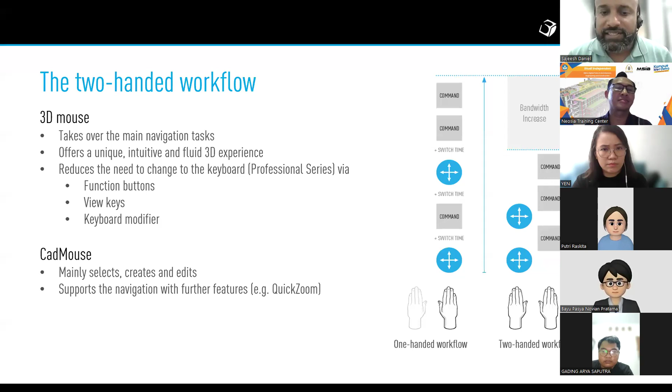I will explain how this works in CAD software. The other benefit of using 3Dconnexion is also the ergonomics part of it, and I will show you how that works. Now let me get straight into the software—I'll just share NX. Raskita, can you see NX?

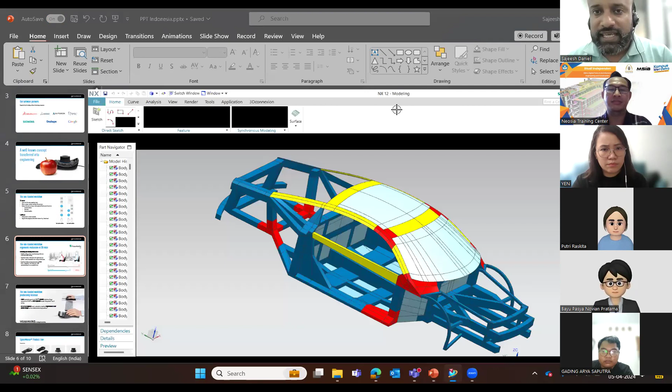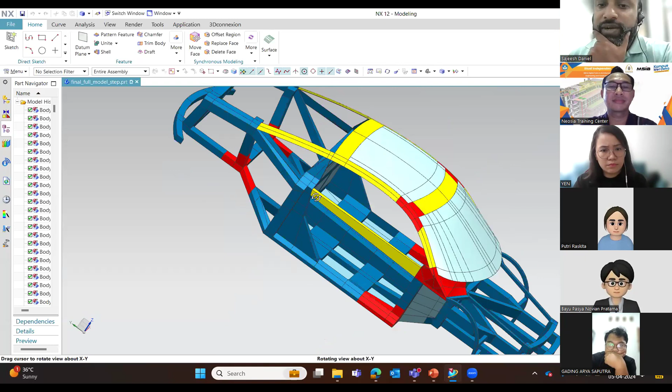Yes, perfect. So now look at this, everyone. When I use one hand with my normal mouse, this is what I do—I'm keeping my hand on my chin. With one hand, you can rotate the model, zoom with the roller, or pan, and stuff like that. So this is how you work with one hand.

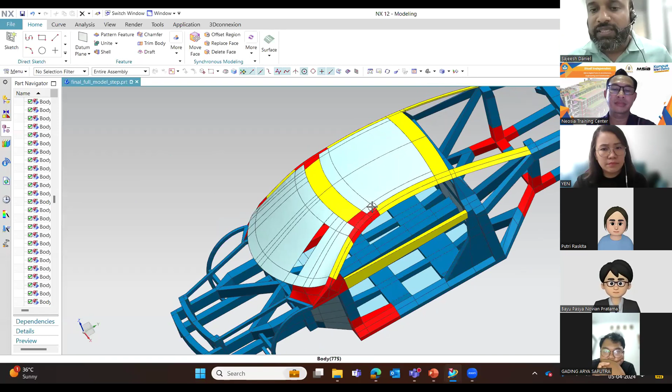But when you use the SpaceMouse, I'm going to hold this and work. See how the model behaves—now the model is moving with 6 degrees of freedom. You have zoom, pan, and rotation happening simultaneously. This is a very powerful feature used by lots and lots of companies. There are millions of engineers in the professional world using the SpaceMouse.

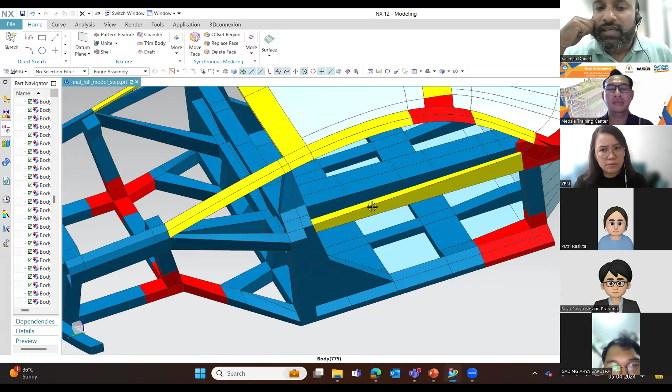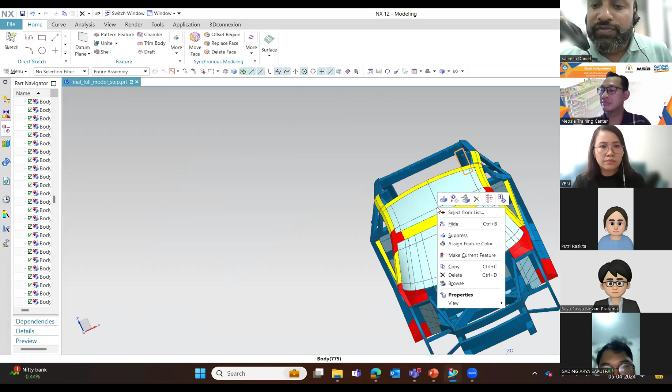So you see, my mouse is still here, and without even pressing the button, I'm still moving the model, and this model moves with all 6 degrees of freedom. You see that it is floating? It's really beautiful motion. You don't feel stressed, you can go where you want, and it's very quiet and very smooth. You see that? This is what happens when you start working with a 3Dconnexion device.

So the model starts moving very fluidly. Now imagine when you're building a house, making a car, making furniture - irrespective of which software you're using, the navigation pattern of 3Dconnexion remains the same.

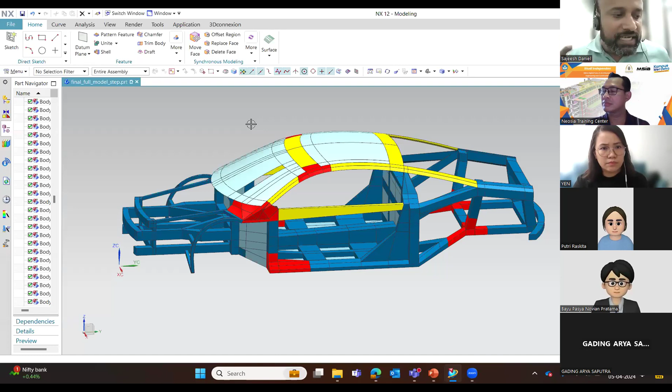So for example, if you're working in CATIA, you have to middle-press and then rotate the model. When you're working in NX, it's like control and middle-press and then move the model. And when you work in Creo or SolidWorks, it's something else. But with a 3Dconnexion device, this is how you move the model - you zoom, pan, rotate, and do everything simultaneously. You see that? That's the beauty of working with a space mouse.

And there are millions and millions of engineers across the world using SpaceMouse. All the big companies you can talk about, like Toyota, Honda, Suzuki, Boeing, Airbus, JCB - they all use 3Dconnexion during their design process.

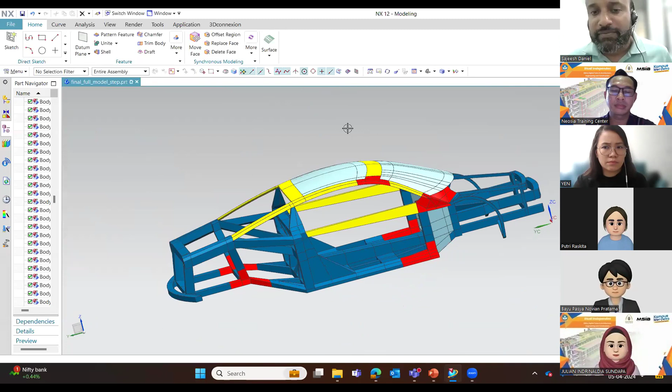Now it's very important to understand that we work with two mice. We are not removing this mouse. This mouse will be on your right hand side, and this mouse is on your left hand side. So you're working with two mice, right? So the function of the right hand mouse is just like what I explained to you earlier.

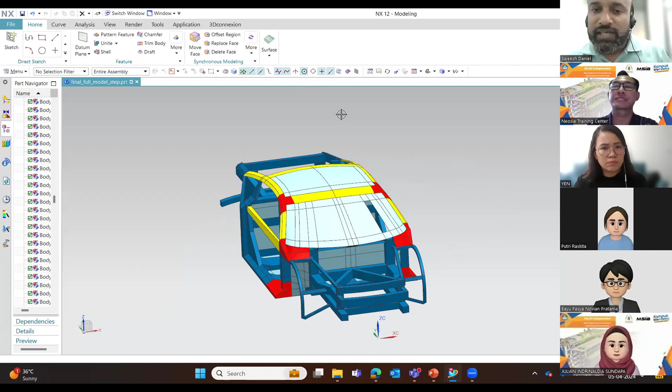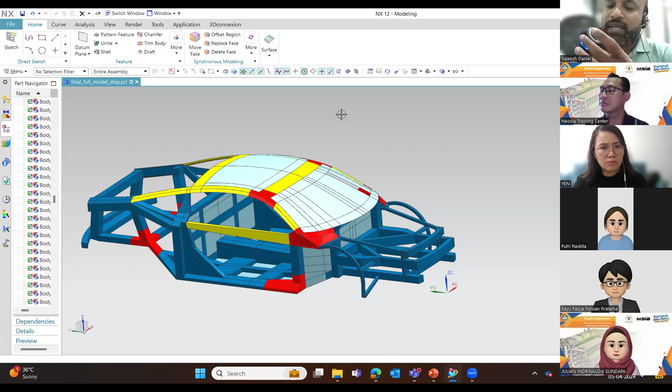With the left hand, you're holding the model - this model of the car is being held with the left hand. If you look at it, this is the model - you see this knob? If you lift it up, it goes up. If you push it down, it goes down. If you push it there, it goes there. If you push it here, it goes here. If you push it in, it goes in. If you pull it out, it comes out. If you rotate, it rotates. If you roll, it rolls. And if you tumble, it tumbles. So you see all 6 degrees of freedom that you learn in mechanical engineering is there inside this optical sensor - that is where you control the model.

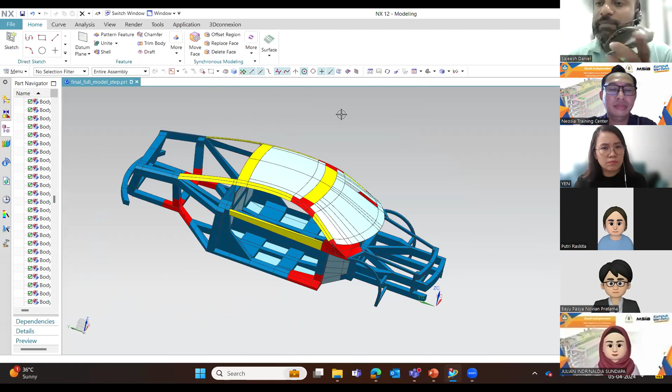You're holding this model with your hand, the same way you hold a potato while peeling. If this is a potato while peeling, you're holding the vegetable, and with this hand you put the command. That's the same way it happens.

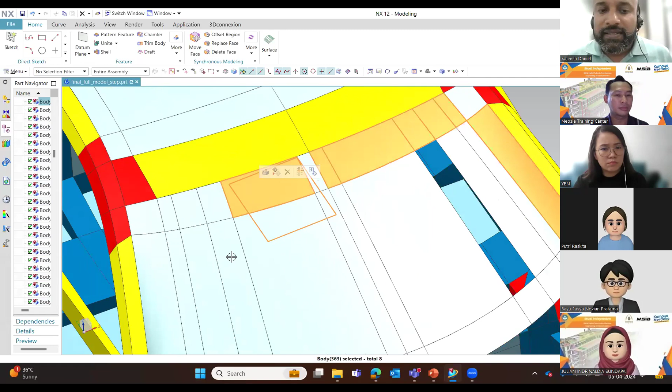So with the right hand, you put the command, you select all the edges - you see how fast I'm able to do that without moving the mouse quite often. That's where when you start working with two hands, you become more productive. That is the essence of working in a corporate environment - when you work with a company, you have to become very productive, and 3Dconnexion is one mechanism using which you can be more productive.

The second thing about using 3Dconnexion is the ergonomics part of it. When you work in CAD or any software, your wrist starts paining, right? I'm sure your wrist is paining. Do you even know how many clicks you do in a day? What's your big guess about how many clicks a person does in a day, or maybe in 1 hour?

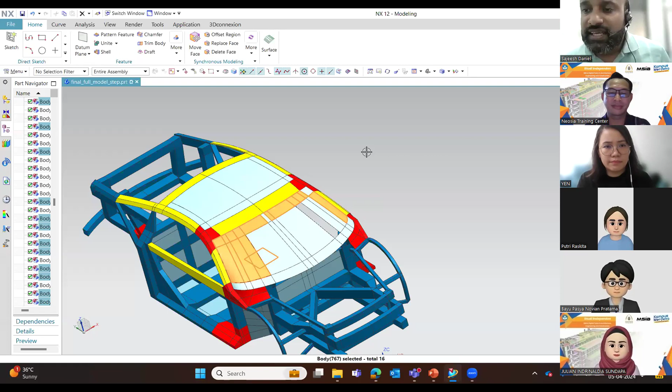Right? So that is where 3Dconnexion comes into picture. And this is one reason why all the people using CAD want to buy a space mouse, because we are now taking all the effort from the right hand and moving it to the left hand. And the left hand is based on sensor, it is not a physical motion.

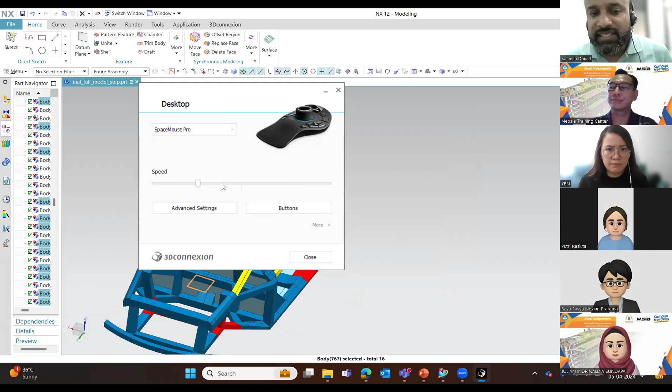So if you look at the software, it can literally adjust the speed at which we are rotating the model and so on. I can just show you here. So here you can adjust the speed, you can adjust the speed of rotation and so on.

And this is a very ergonomic way of working because it comes with a wrist rest, it comes with everything. So this is something which is useful for the CAD industry. And the beauty of this is that our devices work for 10, 15 years. That's the beauty of our products. It is total German engineering, German quality. Once you start using it, it will work for 10, 15 years at least. So that is how it is programmed.

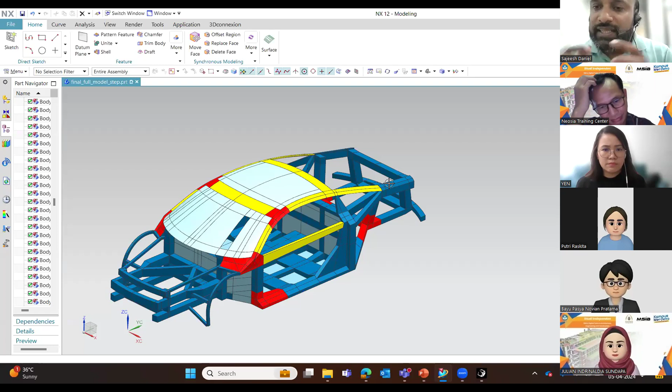Now, for you to understand why this company came into existence, it is because it is a product from NASA. This is a product from NASA. If you go to the 3Dconnexion stories, it shows that the robotic arm in space was moved using this electronics. So this is the same electronics that is used by the astronauts, the same thing that is actually used to move the model in space.

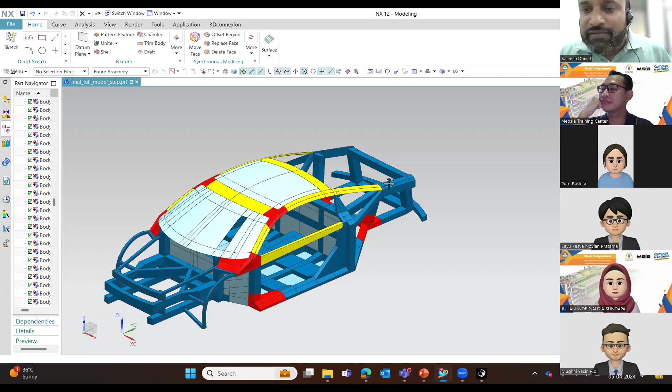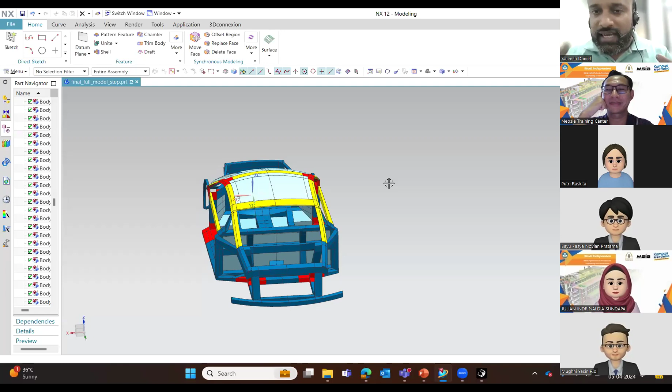So if you look at it, the cursor is in 3D space. That is why all our products are called SpaceMouse Pro, SpaceMouse Compact, SpaceMouse Enterprise, SpaceMouse Pro Wireless, and so on. The word space is coming because it comes from rocket science. That is the whole idea why it is called space. And this model right now is in 3D space, you see how it is controlling the model in 3D space, exactly how it was controlling the robotic arm in space.

So then 3Dconnexion went and showed this model to BMW, and BMW said, we want 3,000 units. And we said, okay, let's make a company. And that is how this company was born 30 years ago. BMW was our first customer because they were using CATIA, and controlling the CATIA model was very difficult. Then soon after BMW, Boeing and Airbus came in and said we want the same thing. And that's how the company became bigger and was born.

So what I'm trying to say is that when you use a 3Dconnexion product - and this is more of a psychological, non-quantitative benefit - people say that the quality of the work you do improves. Now the question is, how does the quality of the model improve when you're working with a 3Dconnexion device?

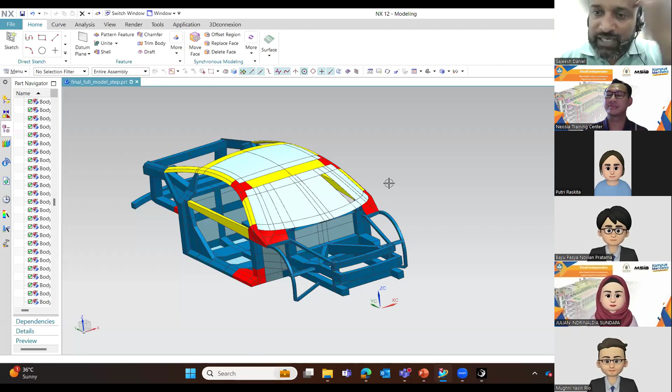Your left brain deals with engineering calculations, scientific definitions, historical methods, empirical methods, whereas your right brain, which controls the left hand, has to do with visualization, emotion, intuition, behavior, and things like that. So now you put both brains onto the model.

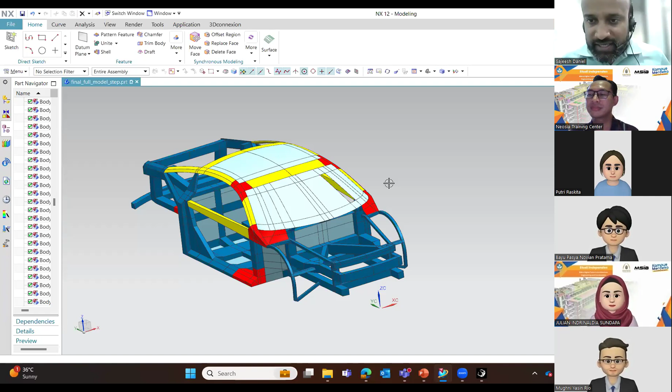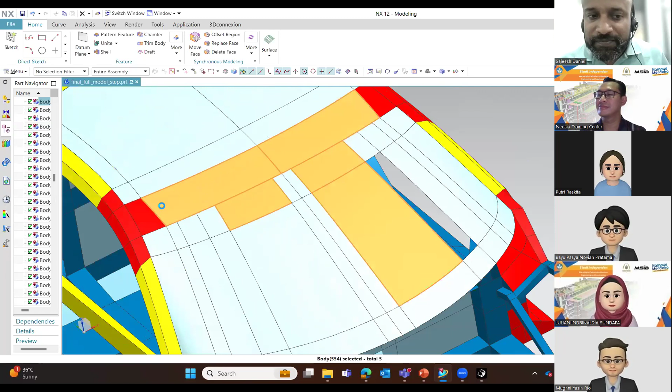You're controlling the visualization, the emotion, the behavior - everything is happening with your left hand. And with your engineering brain, you're looking at it and making decisions. So the chances of error detection are much higher because you're working with two brains put together to achieve a common task. That's where people say that when they start using a 3Dconnexion device, they become very emotionally connected with the model.

Because both your brains are working towards a common goal, a common task. That's why people say, hey, when I start using a 3Dconnexion device, I feel more connected with the model. And that is why once you become a 3Dconnexion user, you'll never be able to work without it, because you're working with two hands.

Right now, you have only one hand. But with a SpaceMouse, you have two hands. Just imagine if one of your hands was tied back - how would you do all the work with just one hand? It's impossible. It makes you a lot less productive. But the moment you realize there's one more hand, you become a lot more productive. You feel like this is the best way to work, because any work you do, you always do with two hands.

For example, let's say this is a book - I'm always holding it with my left hand, and the command to open it or move the page is with my right hand. The left hand is always used for orientation. Even if I'm putting a button on my shirt, I position the hole with my left hand and put the button with my right hand. Every operation - the positioning is done with the left hand, and the command is done with the right hand.

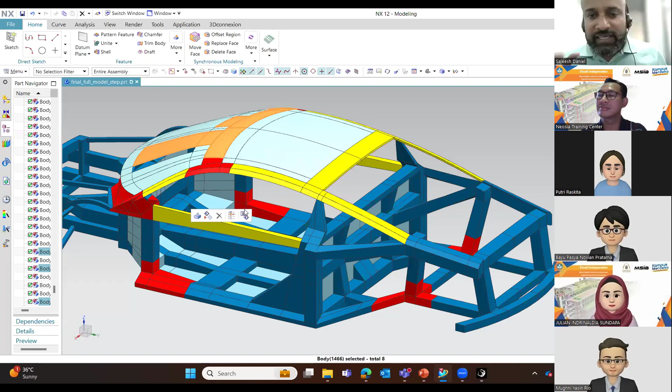So this is the concept of 3Dconnexion, where you start working with two hands. You have six degrees of freedom, your motions of the model are really fluid - it's beautiful. There's no stress of moving the model up and down, left and right, and you start working in a much more immersive sense. That's the whole thing about using 3Dconnexion.

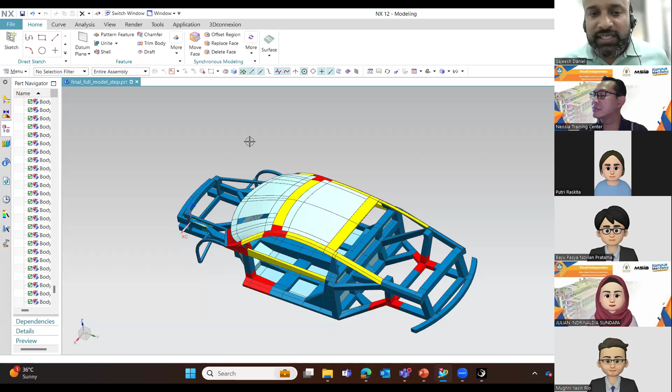Now, having said that, you can also do certain things - like when you have a 3Dconnexion device, you can configure your frequently used commands, such as fit, right angles, front view, top view, bottom views, and so on.

You can also create your favorite commands like this. Now this is beautiful, okay? As a student, when you are learning multiple softwares, you can create your radial menu with all your favorite commands, and you can program it and export it to various environments.

Now, how to use this is, it's beautiful. The moment I press one button, I get all the commands that are important to me, and all I do is swipe the mouse on it and the command gets activated.

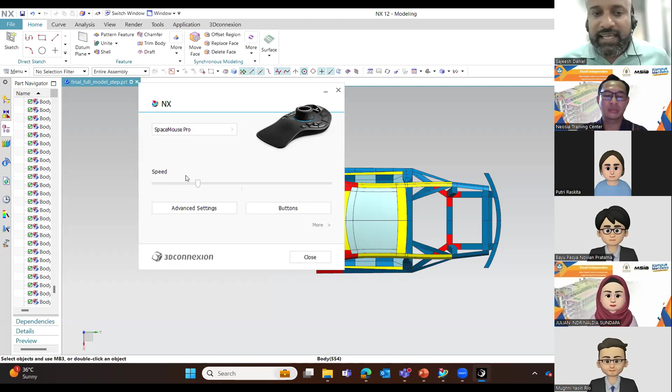This is very useful when you're working in a company where you're working continuously on a project, and all your favorite commands are there in that particular button, so you can use it as and how and where you want. Also, you can export all the settings you've saved and take them to a different computer and start operating from there as well.

So what I'm trying to say is, once you start using 3Dconnexion, you will become a big fan of it, in terms of connecting with the model, the way it moves, and how comfortable you feel using the model inside the software. And like I said, it is neutral, so it works the same way in NX, in Creo, in CATIA, in ZWCAD, in Rhino, in Inventor, in Fusion. Every software, it behaves the same. So this was a brief about 3Dconnexion.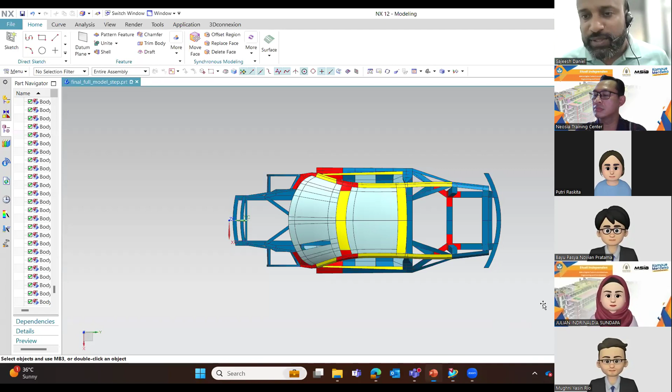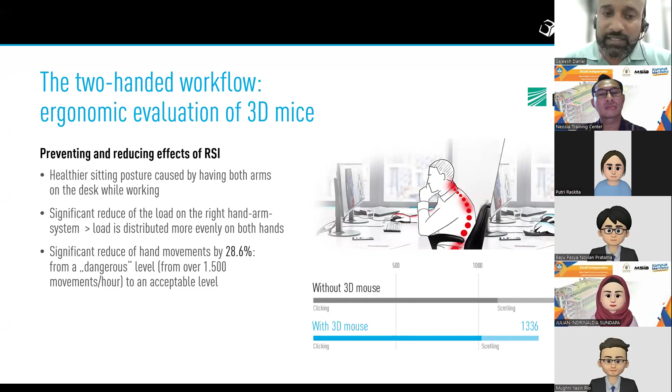Now I'll just go back to the presentation so you get to know a little bit about it. So what we were talking about was RSI, repetitive strain injury, which can be eliminated by the use of a 3D Connexion device. We've also done multiple studies which show that using a 3D Connexion device can improve your productivity by around 28%, which means for every 100 hours of work you put in a company or project, you can save 20 to 28 hours.

This is where the two-handed workflow productivity increase happens, where you start working with two hands, and the number of clicks and movement of your normal mouse is reduced by 28.6%. It's a huge benefit for you as an individual, where you don't get pain from clicking the mouse 100 times. So this can be eliminated.

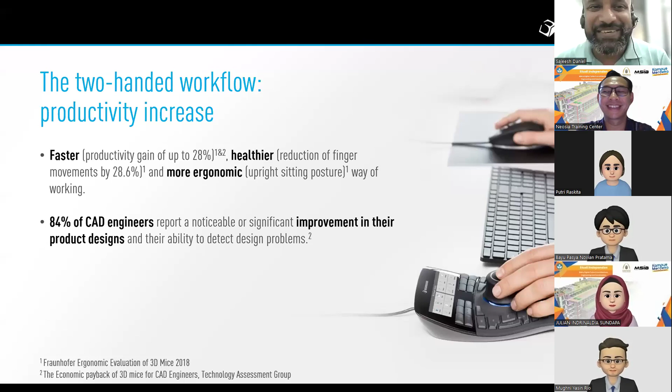Fortunately or unfortunately, we are the only company which manufactures this kind of device. If you don't know what 3D Connexion is, then you don't know this product exists. But now I'm sure there are about 420 students right now who all know that a product like this exists.

So we have multiple product lines, from the SpaceMouse Enterprise to the SpaceMouse Compact. The SpaceMouse Enterprise is the top-notch product. Then we have the SpaceMouse Pro, which is used by thousands and thousands of engineers in the industry. Then we have the wireless and the compact. These are the product lines we have, and we don't make anything else, just CAD engineers' tools, perfect German engineering. This is all that we make.

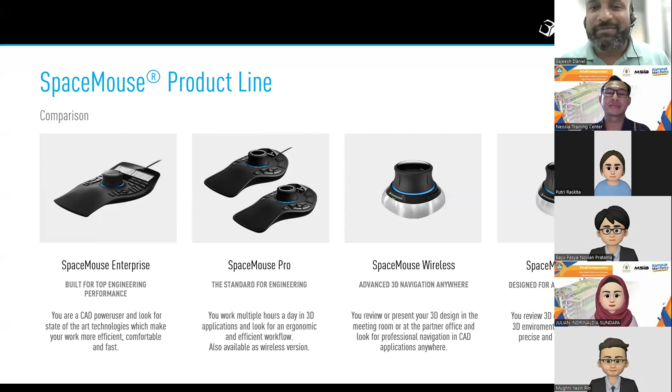If you talk about the customers, all big names, you name it, we are there. I mean, the names not here could be like Toyota. We're there almost everywhere, in literally thousands and thousands of companies. There's literally no large company not using our product. Almost everyone is using our products. These are just a few names.

I'm open for questions. I see some on the chat, I'm open to answering questions. There are multiple questions from our students. The first question was how many DPI is available — I replied 7,200 DPI.

The second question is whether our products are compatible with Blender, Autodesk, Cinema 4D software. I replied yes, it is certified and compatible with our 3D Connexion products, which means there's no issue.

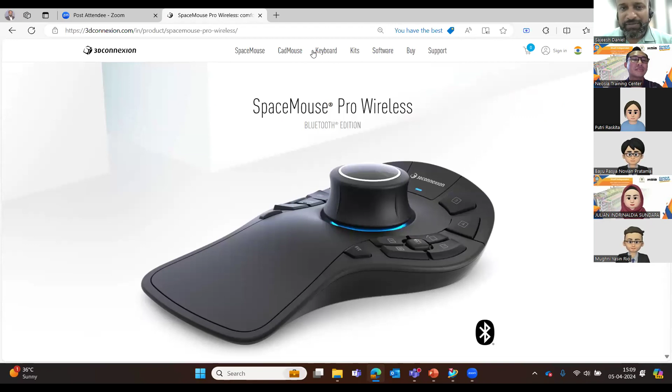Let me share my desktop. I'll just go to 3Dconnexion - it's important to know this, it's a very important question, I'm happy that you asked. So if you look at our products, let's say the SpaceMouse Pro wireless, or maybe we can go to the SpaceMouse entry level, the SpaceMouse wireless.

So here you can see that it is right now wireless, but at the same time it also comes with a cable, which means it can be charged. It also means it can be wirelessly connected through Bluetooth to the workstation. So this is the only mouse which is wired while it is charging, it is wireless once the charging is complete, and it is also Bluetooth.

How do we know that the software or computer we are using is compatible with the 3D mouse? I think on the website there is a list of the software, right? Yes, so when you go here to softwares, you can see the list of all the softwares that are compatible with 3Dconnexion.

Here you can see 203 applications, which covers almost all the softwares in the world.

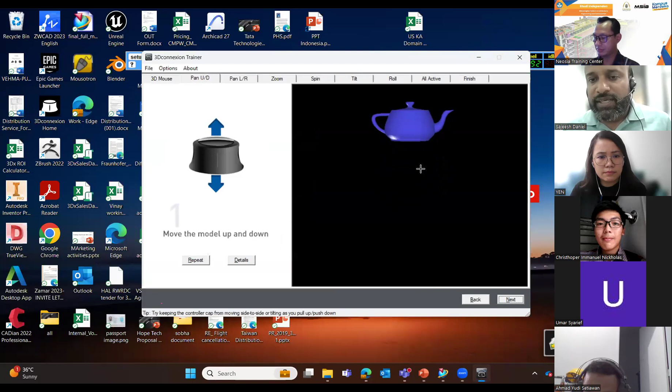So I'll show you how this works. Here you do an up and down, so you learn how to move the model up and down. Here you move it left and right, then in and out, so you realize what you're doing. Then you start with rotate, tilt, and roll.

Once you understand this, the next thing you do is play a game - you have to match this kettle with that one. If you don't match it, that means you haven't learned how to control the model. This should come under 30 seconds - if it does, you're very good. Until it comes under 30 seconds, you're supposed to keep practicing.

One very important thing I tell engineers is that here we are not talking about engineering, we're not talking about CAD - we're talking about muscle memory. It's all about muscle memory. It's like swimming, it's like riding a bicycle, it's like riding a motorbike, it's like driving a car. So 3D Connexion is just muscle memory, it is not about engineering or CAD.

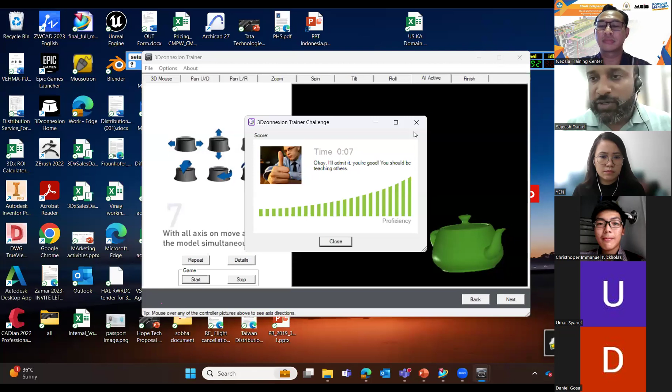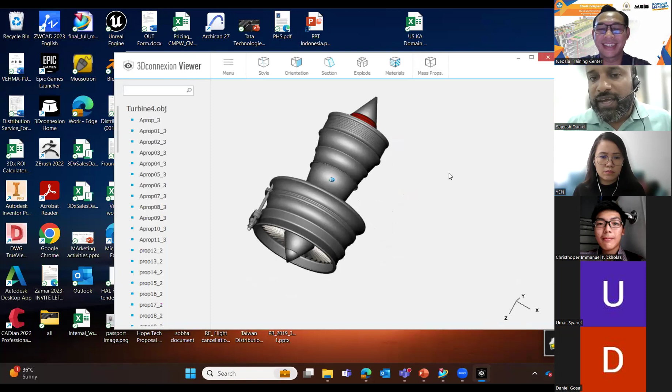Then what we do is ask you to control the model using this viewer. In the viewer you get a model, and we want you to control it flawlessly - it should be beautiful. Once you control this, then we say now start playing with two hands.

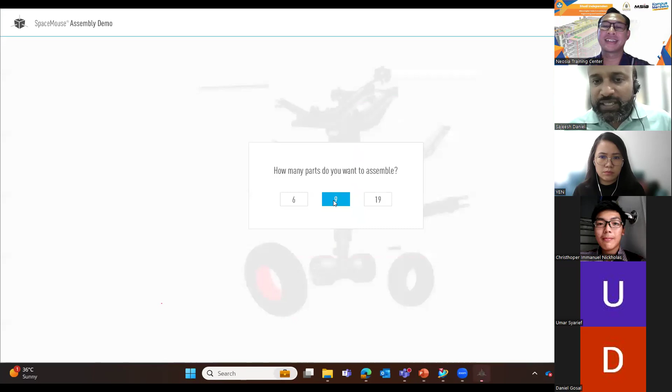Okay, it's coming. So here what we do is we start assembling. You see, I start working with two hands. With my left hand, I'm moving the model, and with the right hand, I'm clicking.

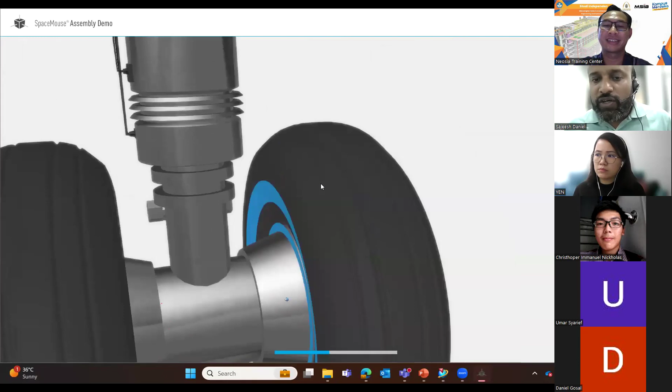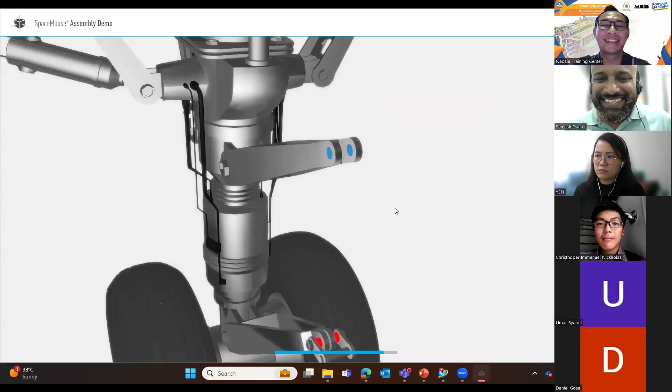So this is the training method. Once anybody who has a 3Dconnexion device undergoes this thing, he automatically learns how to use the device. So there is not much training required. This is not video, though it looks like video, right? Eventually you start working like it's video. And trust me, I'm not a great user of 3Dconnexion, but I always feel the younger generation adopts very fast compared to senior guys.

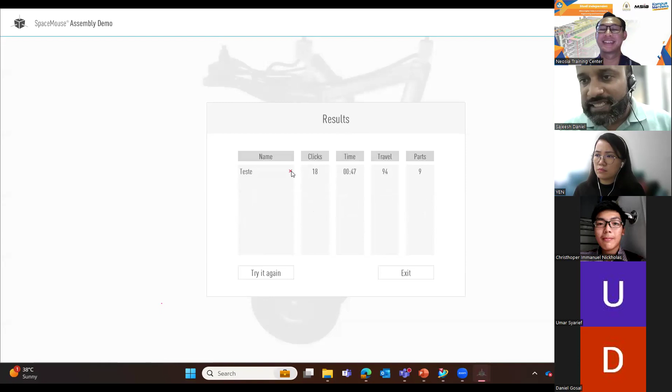So here you can see the distance my mouse moved and the time it took, and so on. You can see that every time you do this task, you become better and better. And once this is complete, we say okay, now open NX, and everything you did there works the same way here. Or you open any software, it starts working the same way. So this is how the training happens, Risky.

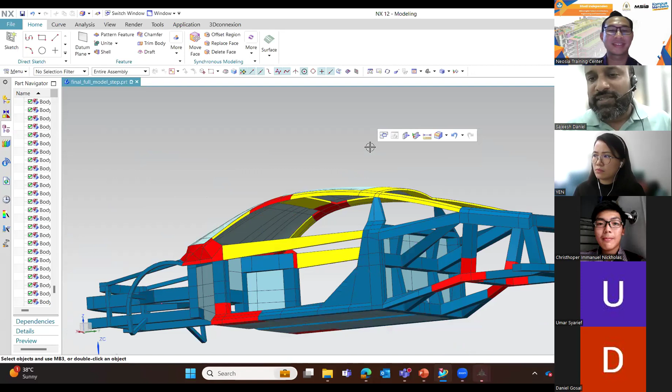Okay, understood. Thank you, Sajeesh, for the explanation. Perfect. Is there any other question? I'm really happy to answer, okay? Please ask me, I'm really happy.

There is a question: I wonder if 3Dconnexion will hold offline promotions in Indonesia in the future because I want to see a live demonstration. Okay, so we can definitely think of it. We like the feedback, we will definitely try to do some promotions in Indonesia. No worry, Neosia can help. Absolutely.

So yeah, Mohammed, see what happens is 3Dconnexion is a 30-year-old company, and we have thousands and thousands of companies which are actually using it for a long time. So you don't have to worry. Once you buy the product, you will definitely love it because it is a standard, and everybody uses it because it does only three things: navigation, productivity improvement, and ergonomics, and these are the three things every engineer wants. And we just give it to you.

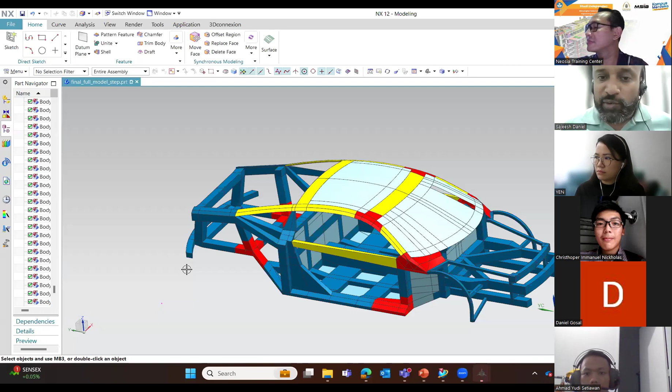And since this is hardware, whether you keep it in China, India, US, or Germany, it will deliver the same result. You press one button, like if you press fit, only fit will come. If you press R, right view. If you press F, front view. If you press T, top view. Whichever software it is, it will always do the same thing, nothing else. There is no magic, okay? I'm doing it fast, but I'm not doing any magic. This is exactly how a person in the industry works, nothing more than that.

Another question: how fragile is the SpaceMouse, and does it require extra care and maintenance for a longer lifespan? Well, I always say that a SpaceMouse is like the fan you have in the house. Do you have fans in Indonesia? In India, a fan has got the highest life among electronics because my father put the fan when my brother was just born, and the fan is still working.

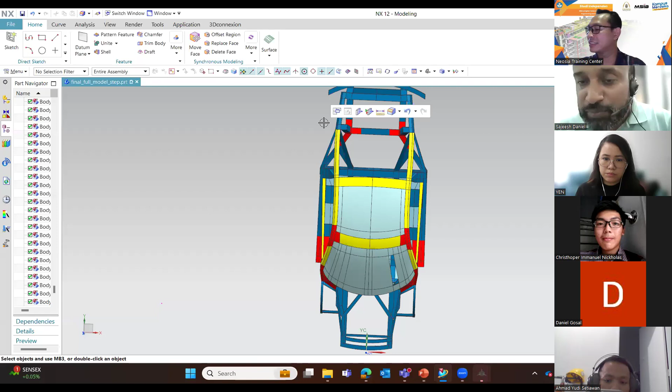It is 35 years. So we say that 3Dconnexion is also something similar, with a very long life, especially the wired products. The wireless product has got a shorter lifespan, maybe 5 or 6 years, but the wired product has infinite life because it works based on a sensor. Trust me, these are really strong products, and the most important thing is they are space worthy - if astronauts had the courage to take it to space, that means the products are strong. Because you cannot come down every now and then and go back to space after doing some service. Don't worry, these are pretty strong.

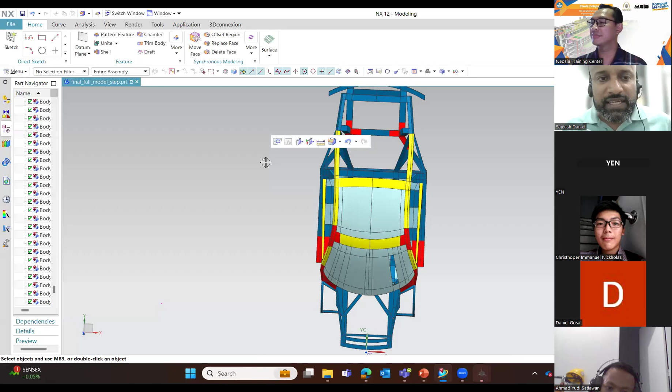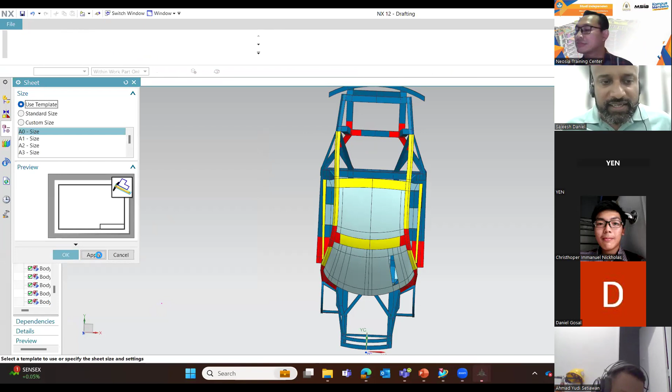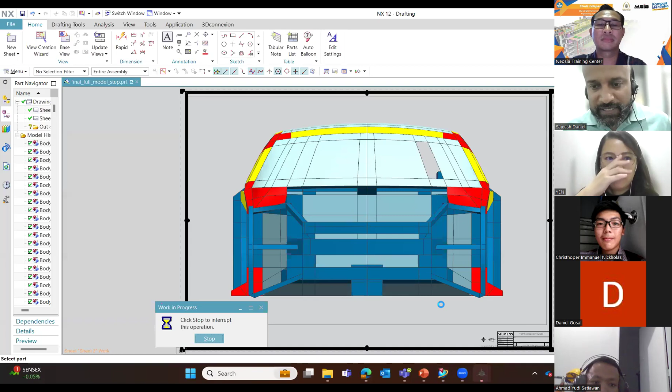When I see the promotion video, I see it's also available for 2D design. Can you demonstrate it, and what's the difference? So you mean if I make a 2D out of it, will that help? Okay, I'm not a very big design engineer, but I will just try to create a 2D out of it, and I say apply. Did something happen? Okay, there's something happening. Finish.

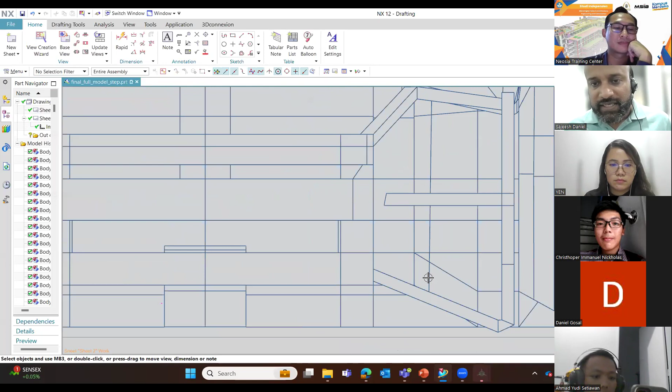Okay, so now we have a 2D view, and you can see how it behaves in 2D. I'm using it with the SpaceMouse. You see the zoom, pan, and rotation all start working the same way, only rotation is not there. So your zoom and pan are now combined into a single motion. You see that?

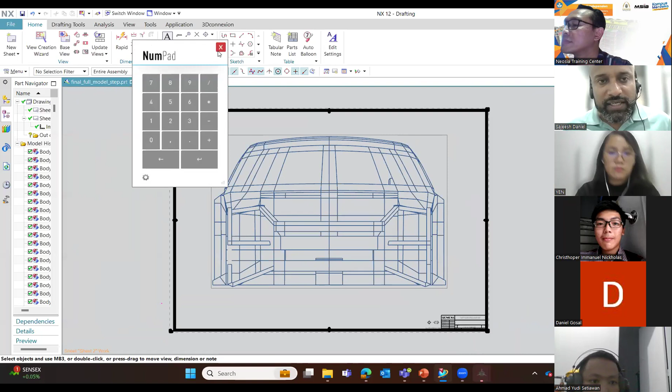And then again, when it comes to shortcuts, you can put in your favorite commands. I'll show you how easy it is. So you can go to your 3Dconnexion properties, and once you go to properties, you can see when you go to buttons, it says NX.

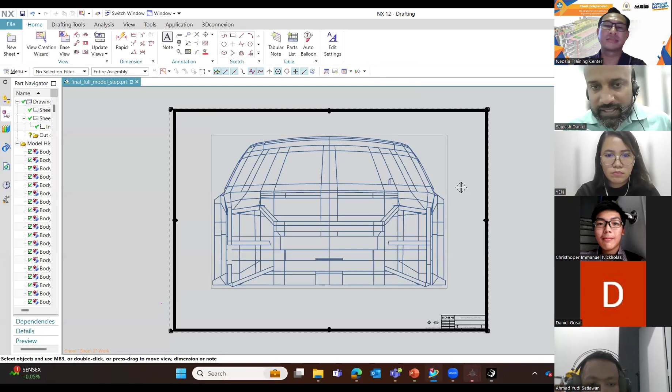NX drafting, then you can create your own radial menu. Let's say I'll create a radial menu, test Indonesia. Let's say we can create some commands like line, and I'm just trying to create it, okay?

What would be some command names so that we can put them in the right place at the right time?

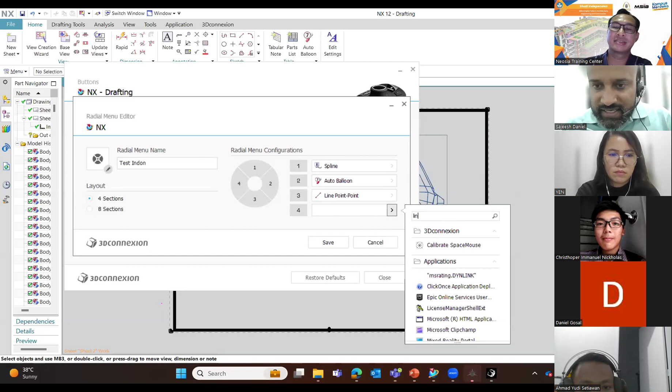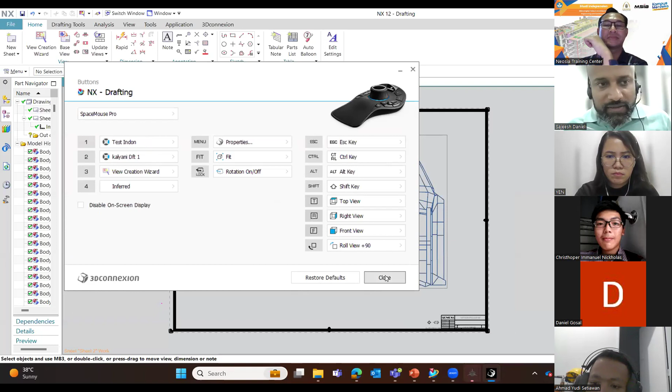Something, okay? You can go up to 8 commands or 4 commands, and then I say save, and this is test Indonesia. And then what happens is when I go to, okay, I say close, and when I press button number 1, you can see the commands which I created.

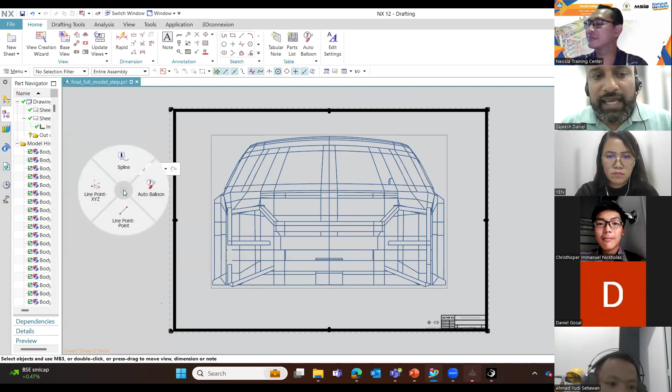So you can do this same thing for NX, CATIA, SolidWorks, ZWCAD, Inventor, and Fusion. So you can decide what commands you want, and by swiping the mouse on that, you can invoke the line command. You see that, from there to there, there to there.

So does that answer the question?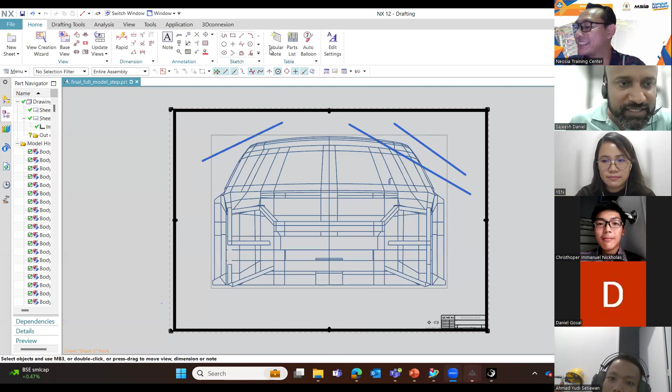Oh, no problem, absolutely. The mouse has so many features. The macro is really helpful for drafting and design. I hope I can try the mouse 100%. Yes, it has got a lot of macro functions as well. You can.

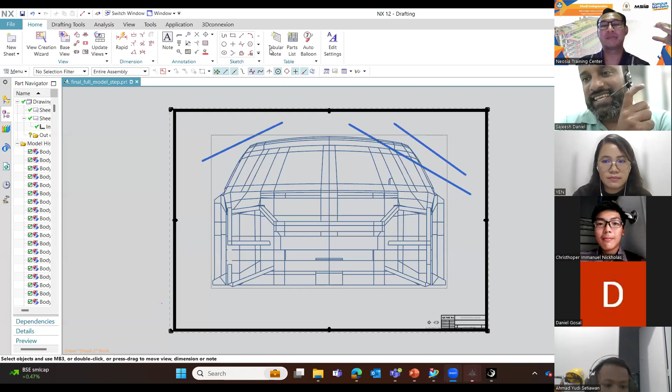So actually I have an old SpaceMouse, about 10 years old, but it still works. What is the name? SpaceMouse, of course, it's like yours but it's the old one. I purchased it in Singapore actually, but there is no driver for it.

I'll show you, go to the support page of 3Dconnexion. Actually, I want to use it with SketchUp. I think the problem is on the SketchUp side, they're not developing for that anymore. No, SketchUp is already integrated here. So what you need to do is just download the latest driver and it will work.

Is it the SpaceMouse Explorer? Yeah, SpaceMouse, I think there's Explorer in the name. Yeah, it's yeah, so it will work with the latest driver. So all you have to do is download the driver and it will still work. Like I said, it's like a ceiling fan.

Okay, we'll talk later about that. We have still 20 minutes left.

Does your product have some opportunity in the future to fully replace the normal mouse or even the keyboard? Well, we believe that we should not replace the normal mouse because our concept, our foundation, is to work with two hands. When you work with two hands, we don't want to replace it because otherwise it is ergonomically not correct.

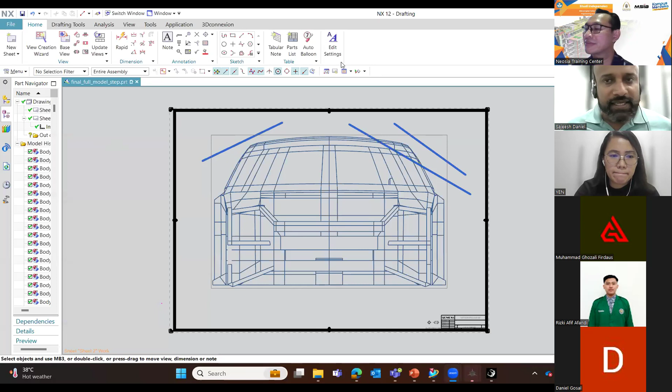So what happens is, let's say, okay, we have the quick zoom function. By pressing one button, I can literally zoom in and zoom out on a model. And on the CAD mouse, again, I have the compatibility, or the potential, to put the radial menu.

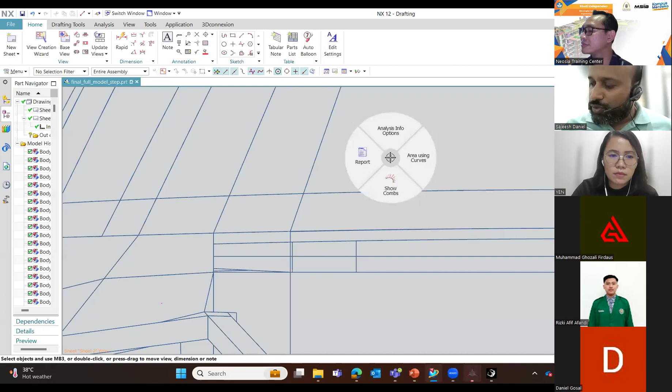And the most important thing, which you missed out, is other than the middle mouse button - now it's very important to understand why this CAD mouse is important. It's important because of the middle mouse button itself, because the pressure you put on the roller is 8 Newton and the pressure you put on the button is 1 Newton. So every time you press the roller, it's equal to pressing the button 8 times. That is the most important function of the 3-button mouse.

So that is where the pain in your wrist goes, because every time you press the roller, you're putting 8 Newton versus 1 Newton. Got it? So that is a very important feature that we considered while designing the CAD mouse.